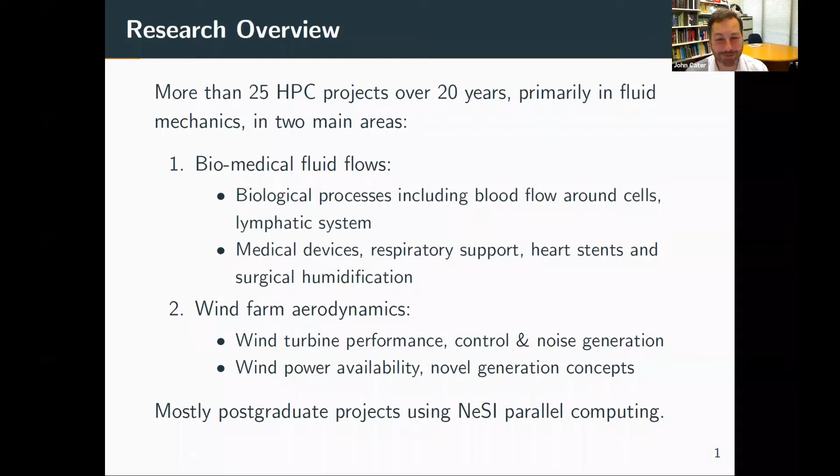So the problem, what these fluid flows all have in common is that they're subject to these governing equations called the Navier-Stokes equations. I deliberately put this in here to scare you if you're not familiar with it, but if you are, it might scare you still. So there are a number of different parts, and these are relevant to how we go about solving the problem.

This equation tells us that there's something to do with time. Yeah, we've got something that evolves in time, and we're interested in this quantity, the velocity or the momentum of a fluid flow. And this is a function of space. Yeah, and that's what these symbols are telling us. So there are gradients in space.

So this problem, when we solve fluid flow problems in general, it's usually hyperbolic. What that means is we need initial conditions as well as boundary conditions, and we propagate them through time. So we use time stepping. So we can't solve the end of the problem until we've solved the start and we've taken steps. Yeah? And so that necessitates long duration simulations or models. They're going to take place over some period.

The other thing to note is that there's often a lot of different length scales. So a lot of different sizes, could be of geometry, could be of physical scales in the flow. And that's going to determine how much memory our computation is going to take. So those length scales tell us about how much resolution we need, how many points in space, how much memory we require, and the time scales tell us about how many steps we're going to take, how much CPU time is going to be required.

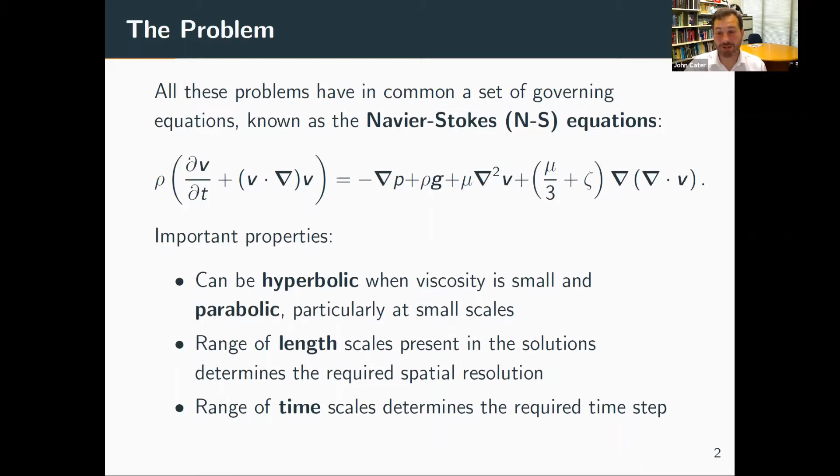Okay, another equation, I'm afraid. So this is characterized by something called the Reynolds number. Many of you will be familiar with the Reynolds number. Essentially, it's a ratio of the biggest scales to the smallest scales present, both in space and time. And the cost, I've written there something about the computational cost. What I'm really saying here is the bigger your problem, the more computational effort it's going to take to solve. And it goes like something like Reynolds number cubed.

And I've put here that the state of the art in direct simulation, so solving these equations on a discretized volume, the best you can do now is about 10 to the 4, maybe pushing 10 to the 5 these days. Flows that we're interested in, particularly me as an aerospace engineer, tend to be in the millions. So that's 20 times 10 to the 7. Sorry for the typo there. Or tens of millions. So flow over an Airbus aircraft would be something like up to 60 million.

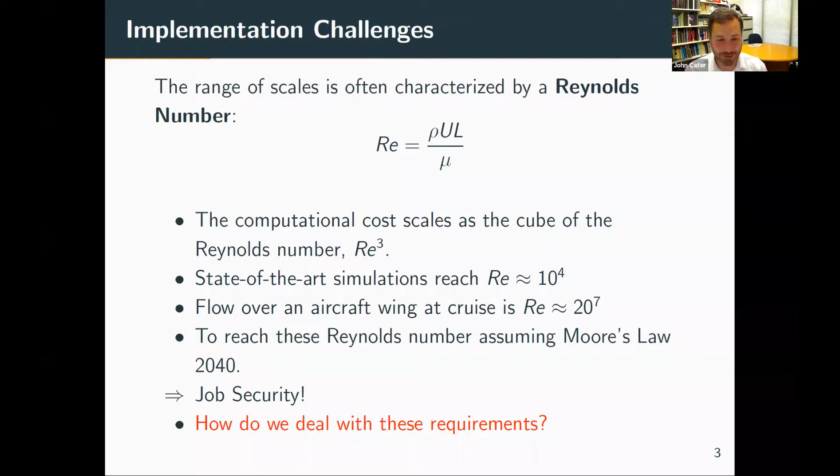And that's not, on a desktop PC, that's not feasible. And it won't be feasible for at least 20 years, probably more. And my line there is that means that for people doing CFD, there's job security for the next little while. Yeah. But the problem is, if we want to solve these problems and physical situations with these high Reynolds numbers, we need a way to deal with it.

Okay. So the first way to deal with these problems is to simplify the equations and to say to ourselves, well, instead of solving everywhere in space at every point in time, can we do less? Yeah? And one method that we use to do that is called the boundary element method, that essentially solves analytical integral equations on the surface of a domain or a problem. And then we can use that to find the solution everywhere.

It works when things are nice and linear. So that's problems like propagation of acoustic waves, electromagnetic waves, Wi-Fi signals, contact mechanics, fracture mechanics, that kind of thing. So it only really works at low Reynolds numbers. And the example I'm going to show is flow through a capillary. So this is something that exists. You've got networks of hundreds of thousands of these things in your body. They have a lumen, think of that as the pipe through which the blood flows, and cells also pass through the center of the lumen.

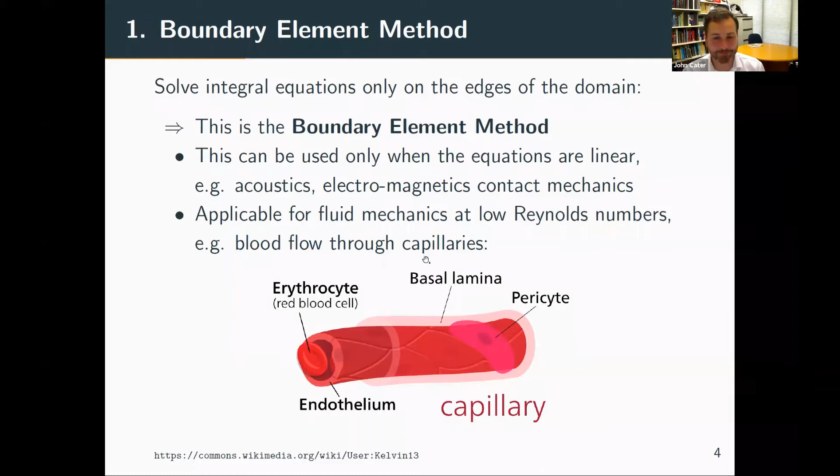The fact that this is sinusoidally varying is important. To do it generically for different geometries makes the maths much more complicated. In this problem, we end up solving dense matrices, and this means that the size of these matrices depends on the number of elements that we have, so the surface elements around the edge squared. So as soon as we get to a reasonable size or a small discretization, we have an n squared problem here, and these problems are going to go very big, and the cost is going to grow large as well.

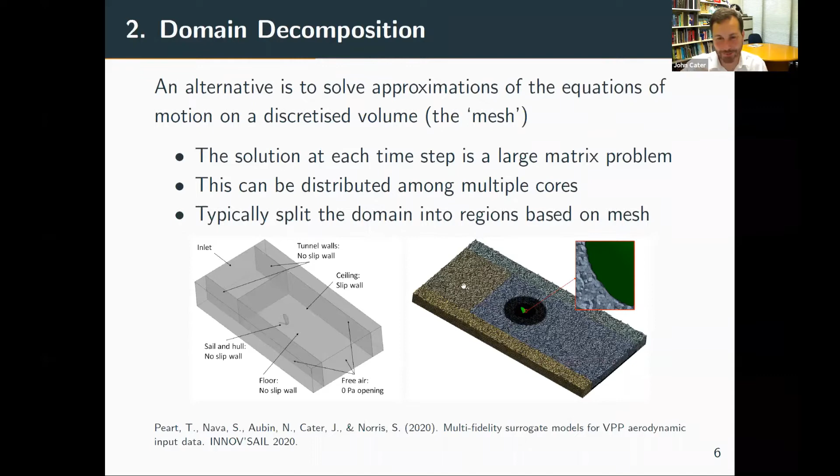And so you can see a finer mesh. There's something happening at the walls. There's a finer mesh again, and then a very fine surface mesh. Fine near the sail, because that's where the smallest length scales are going to be present, where things are happening most quickly at the smallest scale. Okay. And this works well for steady or nearly steady problems. This is using something called ANSYS Fluent, for those who use Fluent.

The downside is that there is a lot of handcrafting of this mesh. A picture here of the mesh. There's lots of special regions, and each of these points and surfaces has been done by hand. So it actually takes days of work to get a good mesh for this kind of problem. In this case, it's a couple of years old, but it used 96 cores and a couple of weeks of runtime to get a time-resolved solution.

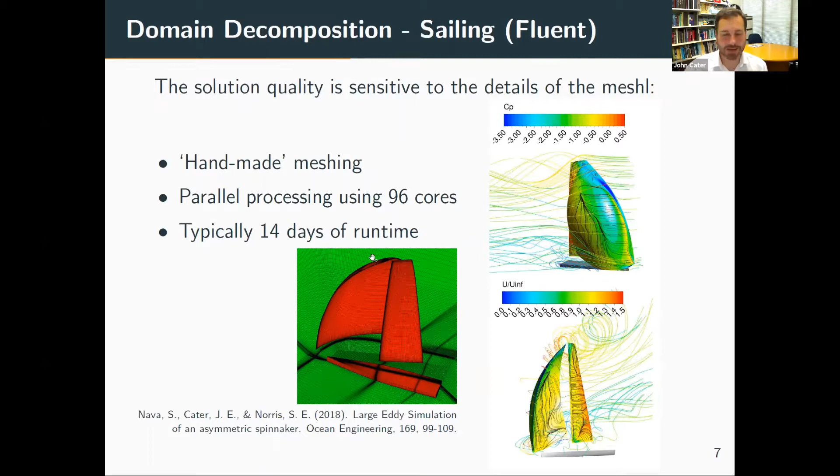Okay, so that would be the standard way. This would be the kind of CFD that you'd use in an undergraduate course. The time resolution, running it for long enough, is probably not something you can do on a PC. You need an HPC. This time has probably come down a bit. You can probably do it in 8 days now. Okay, so those simple kinds of CFD, you can see we've been using Fluent, this commercial package.

Unfortunately, there are other things going on, and each of these makes it incrementally more expensive to solve our fluid flow problems. So the flow around a sail or water in a channel has a single fluid, and it's typically a moderate Reynolds number. Even for high Reynolds number for air around an airfoil, for example, commercial codes have been highly optimized for this problem, but they still take a long time. Things get more complicated when the physics gets more complicated. So I'm just going to show you an example of each of these different situations.

If there's a thermodynamic process, we need to solve some extra equations. So typically the energy equation, if there's thermal effects, heating and cooling and so forth. But if there's some kind of chemical process as well, we're going to need to solve additional transport equations. So equations that require time stepping and stepping in space for those processes. And they might be much faster than everything else going on in the fluid. So they might be the constraint on how quickly we can progress time in our simulations.

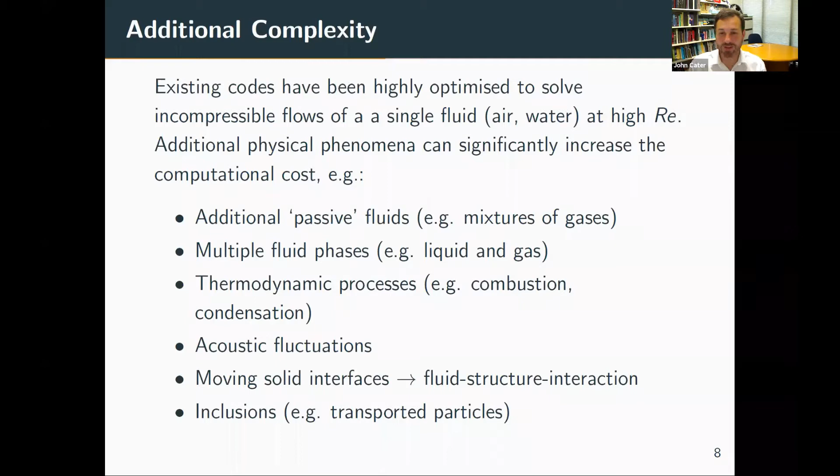So the first flow I'm going to show you is one for work done in collaboration with Fisher & Paykel Healthcare. Scream at me if the movie doesn't show. Okay, thanks.

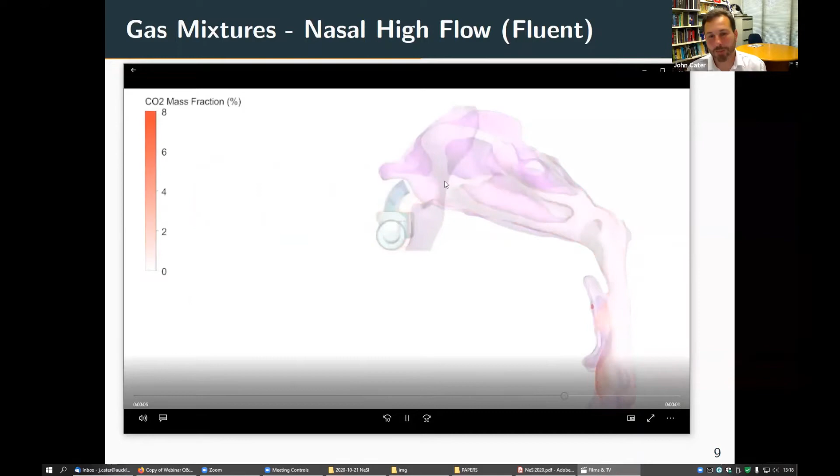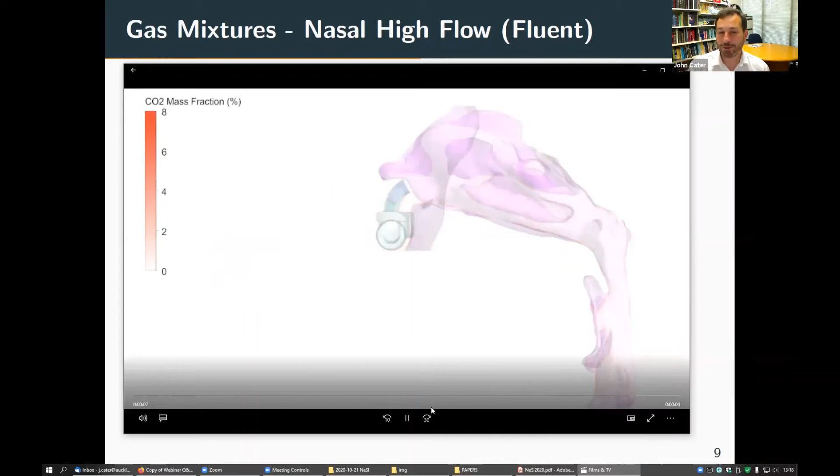This is a case of fluid flow, mixed gases, yeah? And in red, we're seeing the concentration of CO2 during an exhalation when a respiratory therapy called nasal high flow is applied. So we're able to keep track of these gases. You can see the CO2 is being diluted by an inflow of oxygen and nitrogen through the therapy. I just like looking at the movies. And what's of interest here is how fast CO2 is being removed, because that's one of the important things when using this therapy.

Okay. Here's a recent example of two fluids. So this is a geothermal flow. In New Zealand, we have wet geothermal sources. So what that means is when we get steam from the ground, it's a combination of what's called dry steam, so water gas, and droplets, so condensed droplets. And when we put them through pipes, the water tends to fall to the bottom and run along the bottom surface of the pipe.

And some of it stays suspended, but some of it flows along the bottom, and it's moving at a different speed from the gas above. So the gas is moving here from left to right, and the water is flowing along the bottom. What we're looking at in this study is the effect of a flow restriction from an orifice plate at the bottom of a pipeline. So this is work with Contact Energy. And it turns out that if you put a little lip there, this inhibits the flow of liquid and changes the flow quite dramatically.

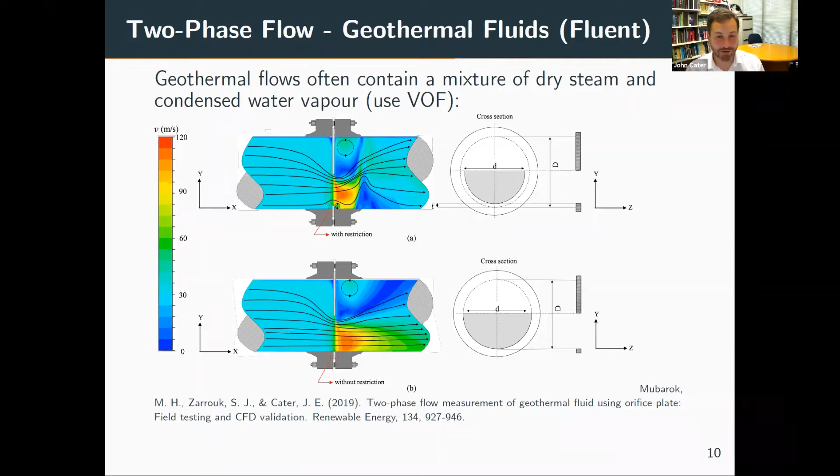Okay. Here's another biomedical flow. And so this is current work with a student called Hussein. We're interested in surgical flows, and this is for the case of laparoscopy, primarily gallbladder removal. So what happens in these situations is that an incision is made, a scope is put into your middle, and an instrument, which here is called a monopolar hook, but it's essentially an electrode. This forms a circuit when it touches the tissue, with your body being another part of the circuit. And when that happens, current flows, and a piece of tissue is cauterized. It's cut or it's burnt.

And the problem here is that when doing this surgery, the wound fills up with smoke. So there are products of the tissue burning, and they stay inside the wound, and they make it hard for the surgeon to see what's going on. So in this case, we're trying to figure out how far we can see after what time, and how much flow should be pushed in. So there's a port to push fresh air or CO2 into the wound to try and push out some of the smoke.

So I've given this diagram because I want to say that in all these examples I'm giving, the CFD is never enough, and we are always relying on experimental data or measurements to validate our CFD.

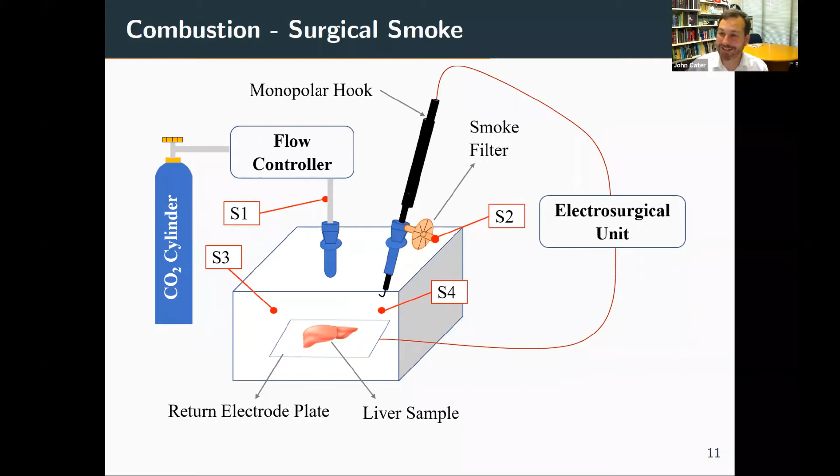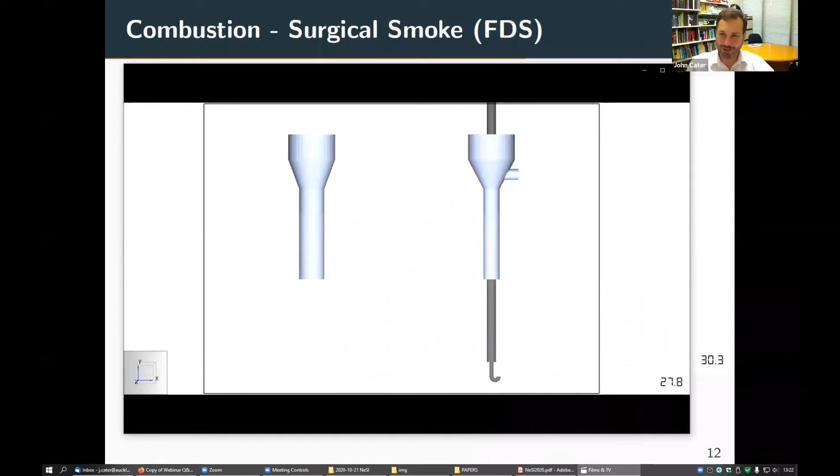So Paul Hussein has been using pieces of pig's liver in a box and filming the smoke inside. But he's also been doing some visualization of the smoke inside the wound. So this is the same box geometry you saw above. I know it doesn't look like anything's happening. What happens with the surgery is that the hook is touched to the liver in pulses of about 1 second long every 5 seconds. And what we have here is a dispersed phase.

So this is smoke particles building up. There is actually an exhaust here, and you might be able to see it coming out the side. Oh, come on. You can see that some of the smoke exhausts here, and there is constant flow through the inlet. So this is an example of this two-phase flow. There's also temperature effects and water vapor produced by this pyrolysis.

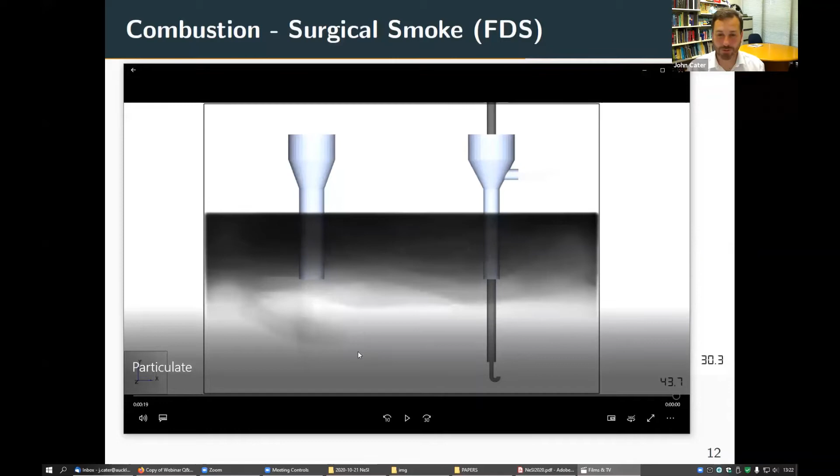So there we have to take account of other boundary conditions like Coriolis forces and so forth. So this is a much bigger, spatially bigger problem, a much bigger mesh. And for this, we're using an open source code called OpenFOAM. I see that Michael McDonald's actually on the call, so he's a co-investigator in this work.

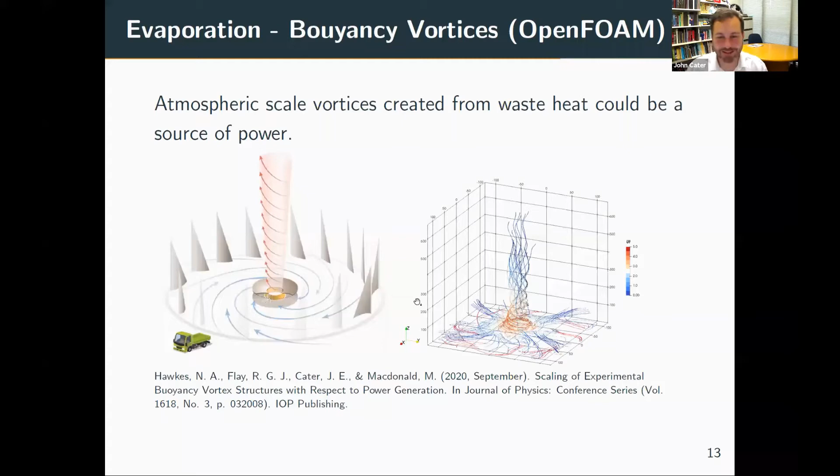I talked about aeroacoustics before. So people don't like the noise from wind turbines, especially for onshore wind turbines. And so we did some work a few years ago about estimating the noise production from wind turbine blades and seeing if we could do something about it by changing the shape of the blades. Now, I've already said the flow over a wind turbine, or something that looks like an airfoil, is maybe 2 to 6 million Reynolds number. So it's a very expensive simulation. The simulations typically take 2 to 4 weeks with 196 cores. So they're very expensive. And in that period, we can only simulate a small part of the blade.

What happens here is we split the problem into two. We first calculate the flow around this blade, and then we know that the noise predominantly comes from the surface of the blade. So it's actually the fluctuating pressure on the airfoil surface that gives rise to most of the noise. So we then take those sources, which were recorded throughout the simulation, and then propagate them in a wave propagation method out to discrete receiver locations.

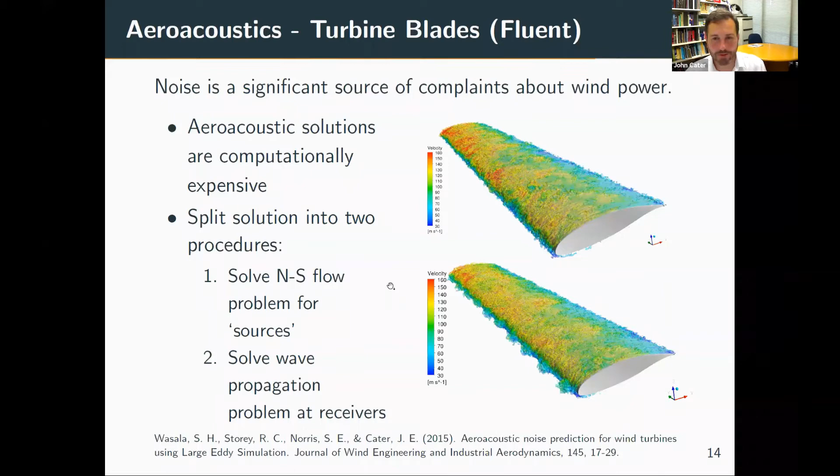Okay, here's another tricky one. So this is again motivated by a New Zealand concern, which is the production of methane in ruminants. So this, believe it or not, is a picture of a sheep stomach, a sheep rumen, which has a number of sections. And what's known is that the production of methane varies between individuals, but it's got something to do with the passage of different feed through different parts of the stomach. You feed the sheep differently, different methane is produced.

So in this domain, this is representing the different parts of the rumen. There is this line here showing the liquid layer. So in here there is gas on top, what's called a gas cap, and underneath this is liquid. And what we've done is injected particles, bits of feed if you like, with different sizes and properties into this, which is called the reticulum.

And we want to see how they move through the rumen as digestion happens. So as rumination occurs, what happens is this changes shape. So this is an example of FSI. The boundaries here,

once again, I know what a rumen feels like. We did both put our arms, and the research student here, Stephen Waite, who's now a postdoc, we asked him to put his arm into ruminants, and his supervisors did the same, show willing. And we did extract rumens from cadavers as well. So if you ever have the opportunity to feel a sheep's stomach, you'll know that it's very floppy.

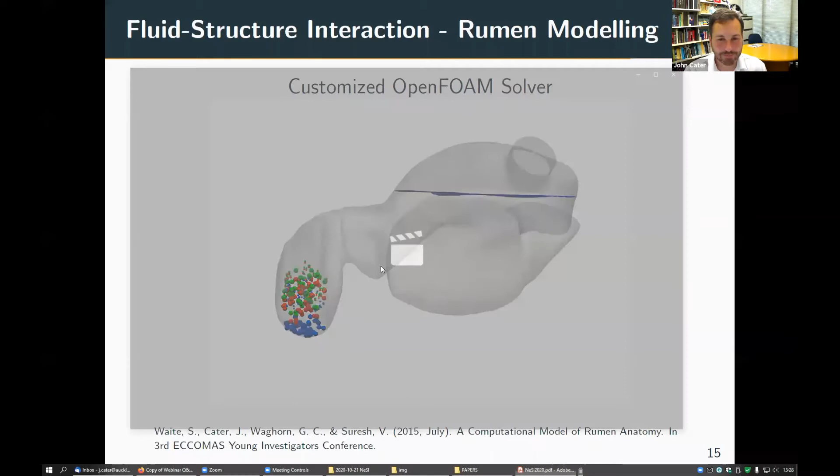So here we go. We're letting go different particles with different densities. And what happens is that the reticulum, this part on the end here, contracts periodically. And you can sort of see the slower waves in the rest of the rumen. So what we're interested in is, for different size feed, where does it end up? Well, how long does it stay in each part of the stomach?

So the other complication with this problem is that the flow, the gas is fine. It's just a discrete phase of gas above. But the flow here, the fluid, once again, you probably haven't had the chance, but digesta is a non-Newtonian fluid. So what that means is that it behaves differently depending on how much shear it experiences. So it's not like water or air.

It sometimes behaves like a solid, like a mass of grass, if you like. It's been eating grass. And sometimes it behaves like a very thin liquid. It's mostly acetic acid. So when you have a non-Newtonian fluid, you have an additional equation which tells you about the stickiness as a function of the flow everywhere. And this takes additional time to solve as well.

I'm going to play it once more just because I like it. So again, this is using OpenFOAM, this open source solver. The reason for using this is because we have to implement our own physics to get good solutions in a reasonable time. But again, this is taking weeks on a parallel computer.

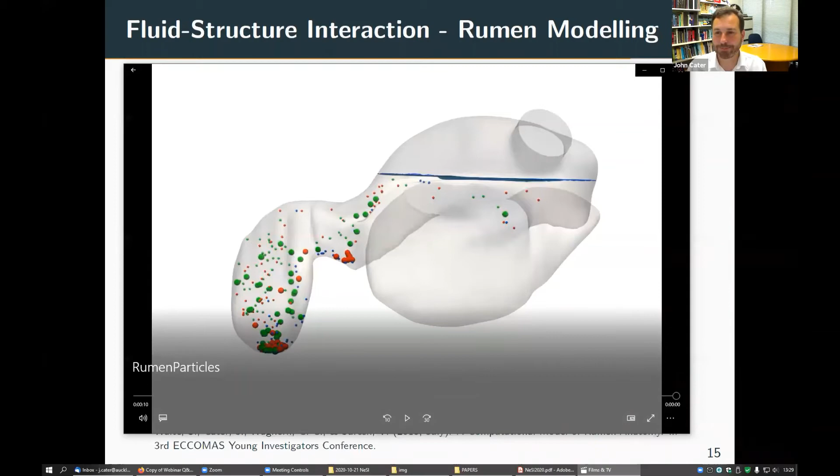The last one I want to show you is everything at once. This is a simulation of a gust moving through a wind farm. And this is using a custom, what's called a large eddy solver from Stuart Norris in Mechanical Engineering, done by a student, Rupert Storey. Okay. So this shows the progression of a gust here in red moving through a wind turbine. An offshore wind farm here.

This is everything at once because it includes an atmospheric boundary layer. Actually, each of those turbines in there and each of those blades is being simulated, and the controllers on each of those are being simulated. So the controller time step is very, very short. What we're seeing in the simulation, this is approximately twice real speed, but the time steps on the controllers are about 0.01 of a second.

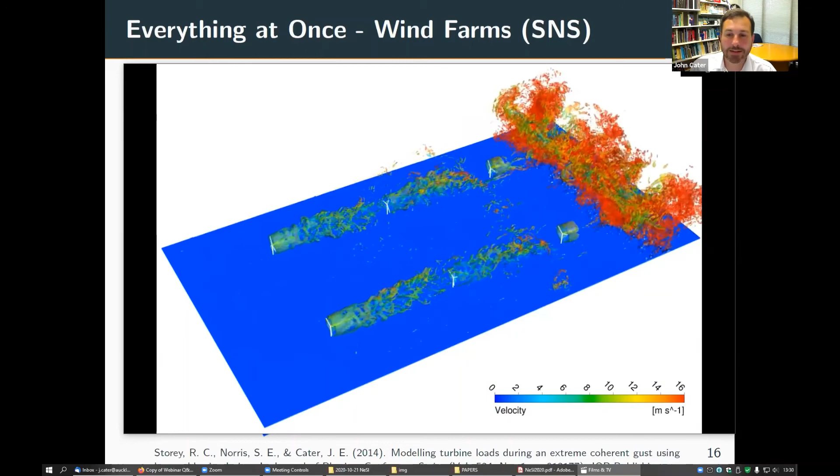So also, if you would see that as the wind changes direction, the actual turbines are able to rotate as well. So we've got different types of fluid. We've got an atmospheric boundary layer. We have temperature gradients. We have roughness from the sea floor. We have fluid structure interaction. Actually, the blades are allowed to bend in response to the forces as well. So we have very fast timescales associated with those, and the towers can shake.

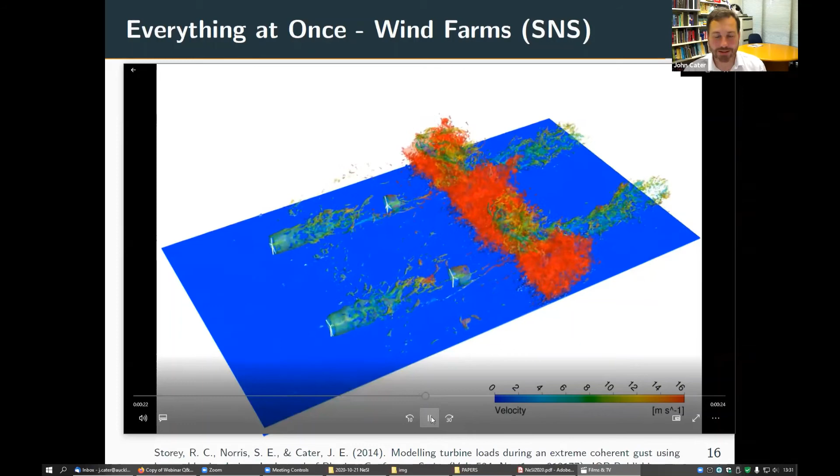So we haven't got any discrete particles in here. That's the only thing. But this is an enormously expensive simulation, and took about 2 months. What we're interested in is the response of the turbines to sudden changes in wind, and how we might optimize them to reduce the damage on the turbines. I'll let that finish. It's cool.

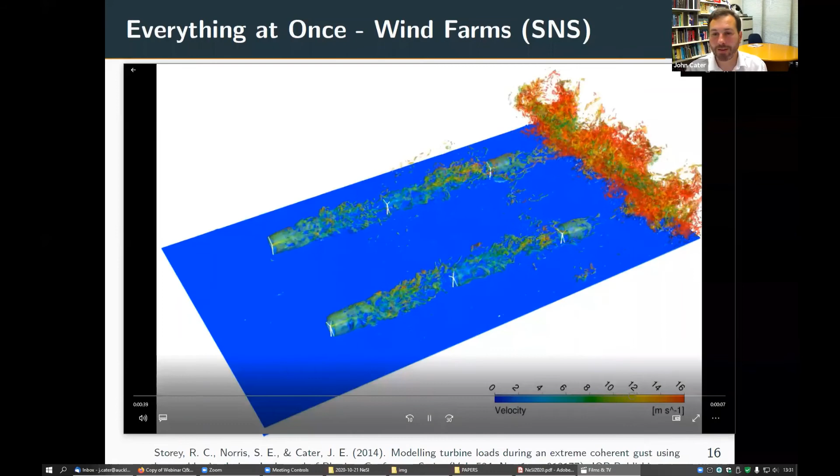Okay, so that's a bunch of pictures giving an overview from little cells to the atmospheric boundary layer. I wasn't sure about the audience today, so I'm going to take the chance to pontificate about a couple of points which I get worked up about. So the first thing, well, questions I often get asked about doing CFD on NeSI. So open source solvers. Absolutely.

I think if you looked at those examples, you saw that back 5, 10, 15 years ago, we were using commercial solvers because it takes hundreds of thousands of hours to develop a robust Navier-Stokes solver that can handle a range of problems. So we were using commercial solvers, primarily ANSYS solvers. These days, people I work with, we're tending to use OpenFOAM, which is an open source fluid solver.

It's customizable because you have the source code. It has a steep learning curve, probably a month to use the software, but it's getting better, and it's got much better over the last sort of 4 years. So I think in the future, we'll be using more OpenFOAM. We also use custom codes that we write. I write my own CFD codes. I'm sure Michael does as well, and Stuart Norris does as well. We do this where the physics aren't captured in an existing code.

The really exciting problems in the future tend to be these fluid structure interaction ones, where we're interested in the forces between objects and the flow around them. And I think more of that's going to happen as NeSI and other HPC get more powerful.

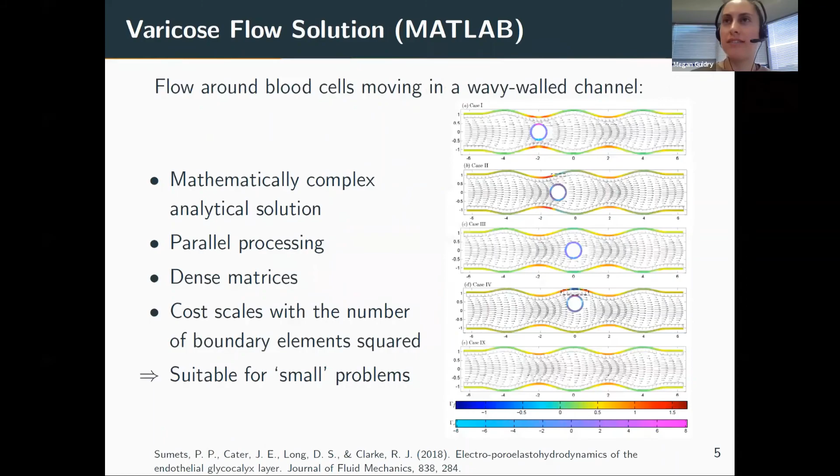So do you have any recommendations or resources for people looking to learn OpenFOAM? There is a wiki online that comes with OpenFOAM, and that's the first place most people start. It's not usually enough. It's not very good. So CFD Online is a forum, and lots of people post their questions there and get pretty good answers. Awesome. I'll see if I can find that link and put it in the resources bit of that question doc.

So next, what are the biggest issues you found in moving code to NeSI? Oh, in moving code to NeSI, relatively recently, it was the authentication and that kind of nonsense. Sorry. You're logging into a node which is not actually the compute node, which then logs on to another node, and using a different authenticator from the rest of the university, and that was a problem.

In terms of development, we tend to develop on local Linux machines, and if you can run some flavor of Red Hat, then it's simple to just recompile or transfer it to NeSI.

Awesome. Fantastic. And I wanted to ask, do you have any tips for people looking to scale up their work if they don't have experience with using high performance computers? What would you suggest to someone that's new to the journey? I would suggest that they're not let loose on NeSI.